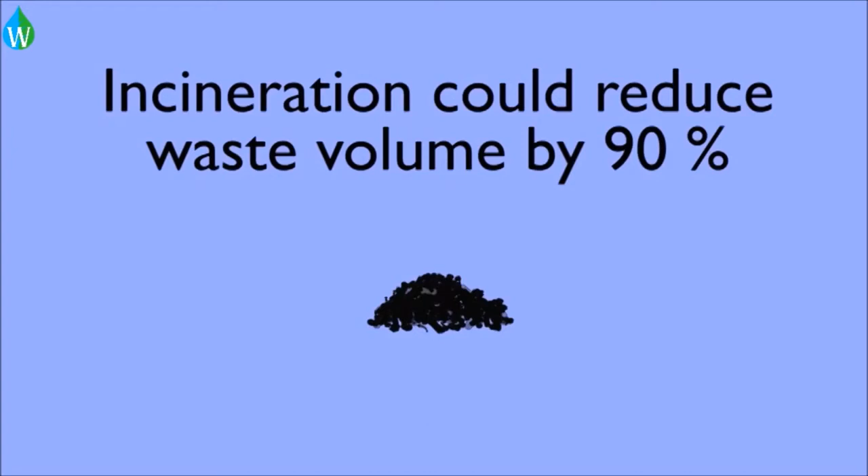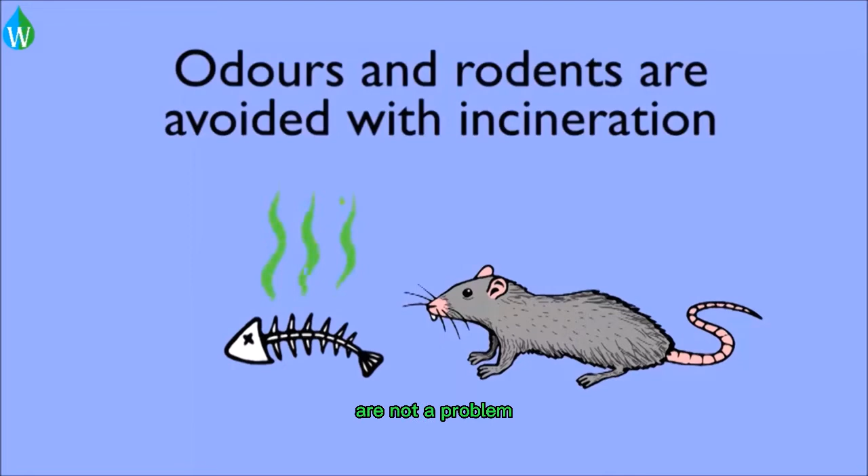Incineration could result in a reduction in waste volume of around 90%, and this could be particularly important for small cities where space is scarce and landfill is not an option. Odours and rodents that are present in other methods are not a problem when using incineration as a garbage disposal method.

Nearly all of the waste that is burned could be used to generate electricity in what is called energy from waste schemes, where households and industries could benefit from the electricity or heat produced. The electricity generated could help to pay for the start-up cost of the incinerator. Additionally, the steam produced from incineration presents itself as a cost-saving energy source if recycled.

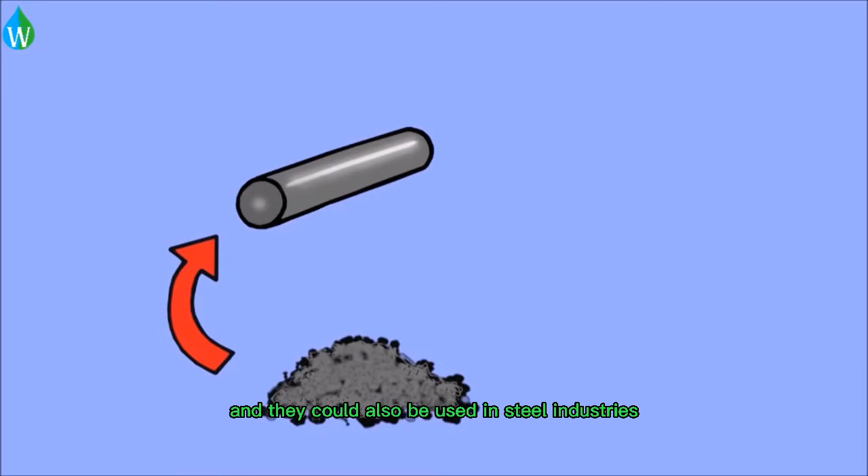Ash produced from these incinerators could be used in the construction and road building industries. In addition, metals could be extracted from the ash, and they could also be used in steel industries. The key advantage, however, is that the production of electricity and thermal energy from waste enables us to conserve conventional sources of energy, such as fossil fuels.

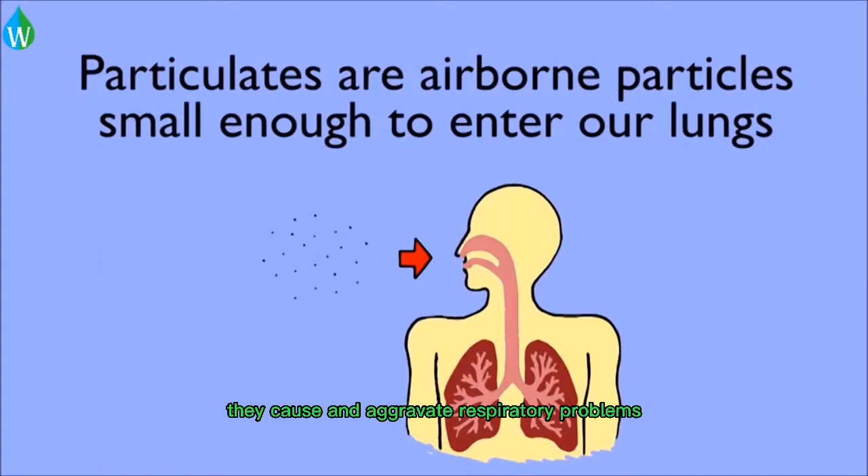Now, what about the disadvantages of incineration? The main disadvantage surrounds potential pollutants found in the ash left in the incinerator and those that could be emitted from the chimney. These include dioxins, acid gases, nitrogen oxide, heavy metals and particulates. As you may have heard from other videos, these are airborne particles which are small enough to get into the lungs of humans. They cause and aggravate respiratory problems such as asthma.

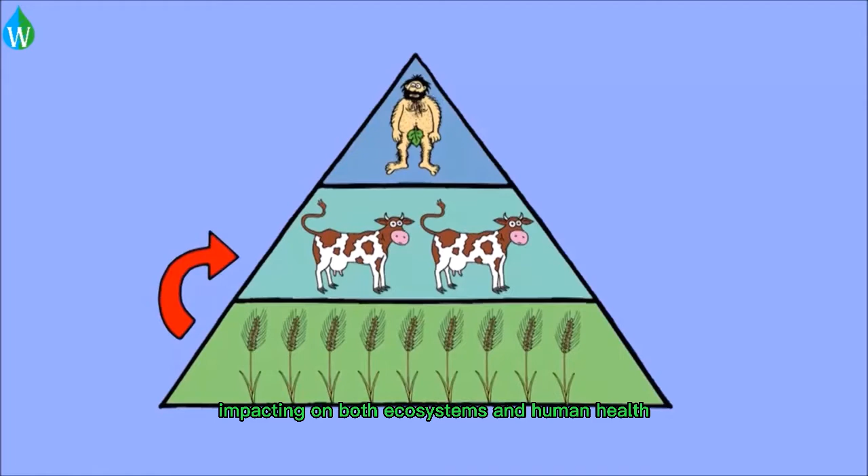However, it is the dioxins resulting from incomplete combustion contained in the gases from the chimneys that attract the most concern. This is because they are suspected of causing cancer. In addition, these emissions could be distributed through the food chains and accumulate over a long period of time, impacting on both ecosystems and human health. As a result, many people are opposed to having incinerators built in or near their communities.

Another disadvantage is the initial start-up cost to build a waste incinerator for the production of electricity, and it may not be seen as a viable alternative where cheaper waste disposal methods exist. Once built, the maintenance of the machinery could be costly. The biggest disadvantage, however, is that if waste is incinerated without first being sorted, this means we are incinerating waste that could have been recycled.

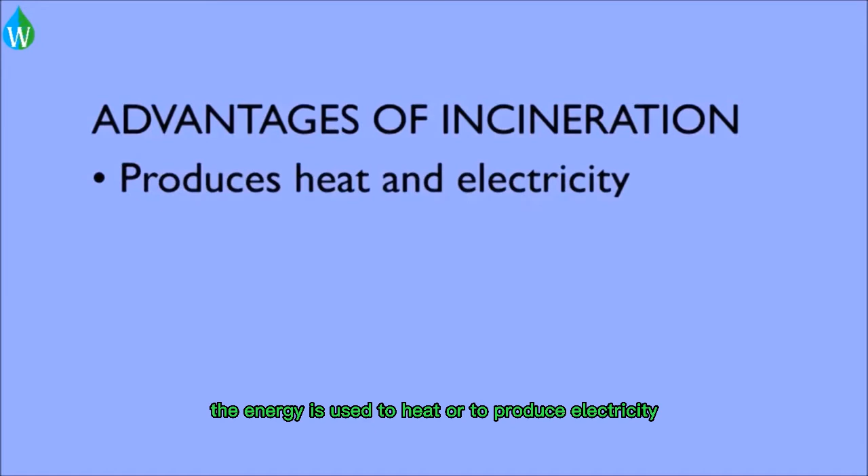So, in summary, incineration of waste presents numerous advantages. 1. The energy is used to heat or to produce electricity for homes and industry. 2. This method reduces the need for fossil fuel consumption. 3. The ash produced can be recycled for metals used in the steel industry. And finally 4. This method reduces the volume of waste produced.

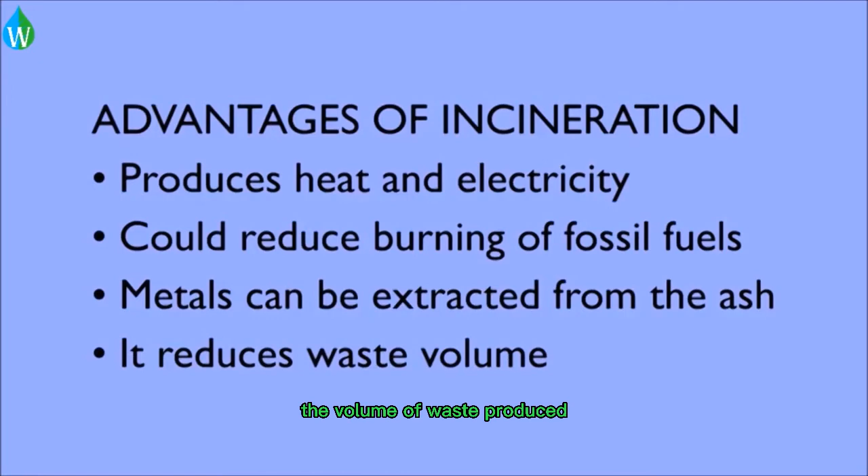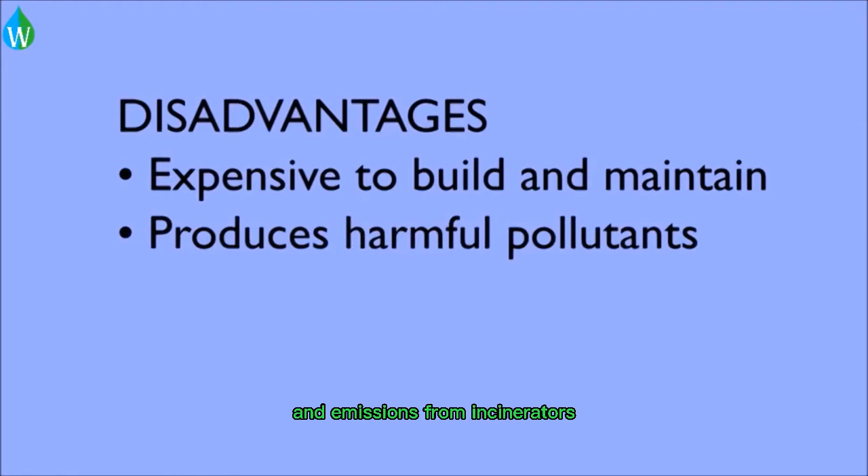There are also disadvantages. 1. Incinerators are expensive to build and maintain. 2. Pollutants in the ash and emissions from incinerators are harmful to health and ecosystems. And finally 3. Waste that could be recycled will instead be incinerated if not properly sorted.

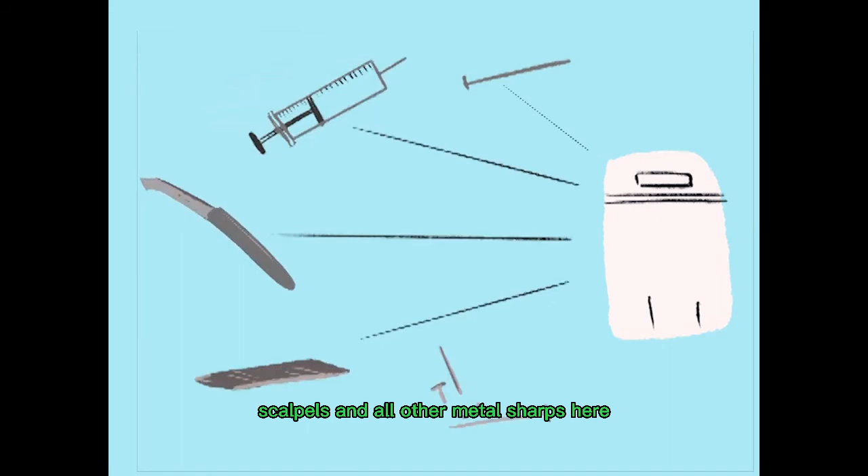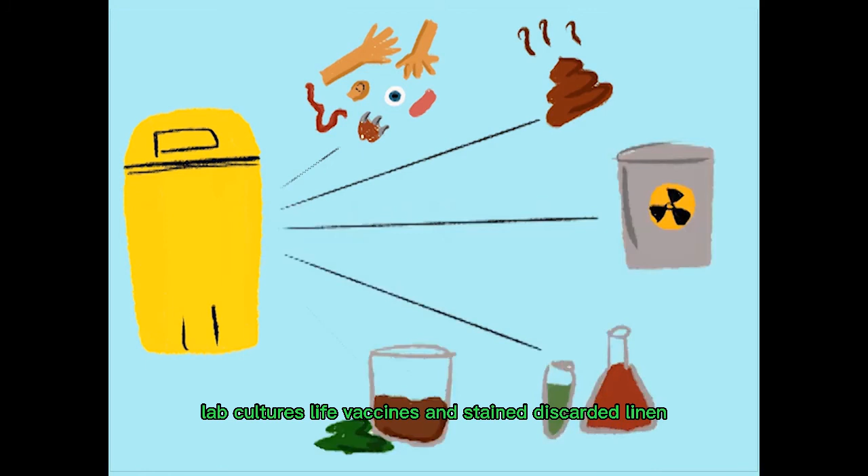Yellow: tissue or body parts, dressings, cotton swabs, human waste, blood bags, lab cultures, live vaccines, and stained, discarded linen. Blue: broken or discarded glass, vials, ampules,